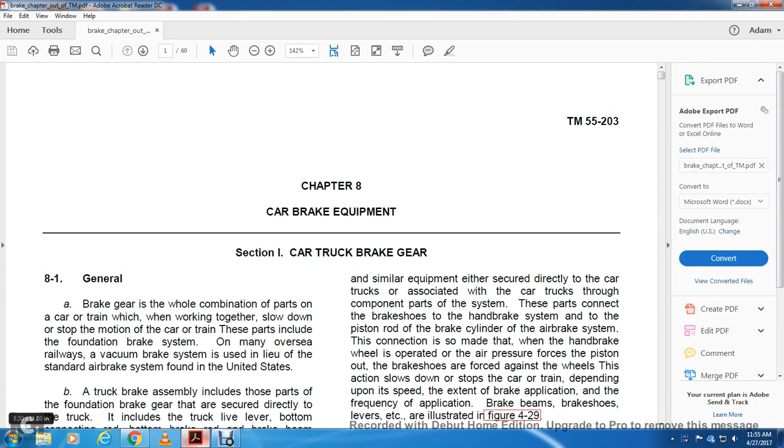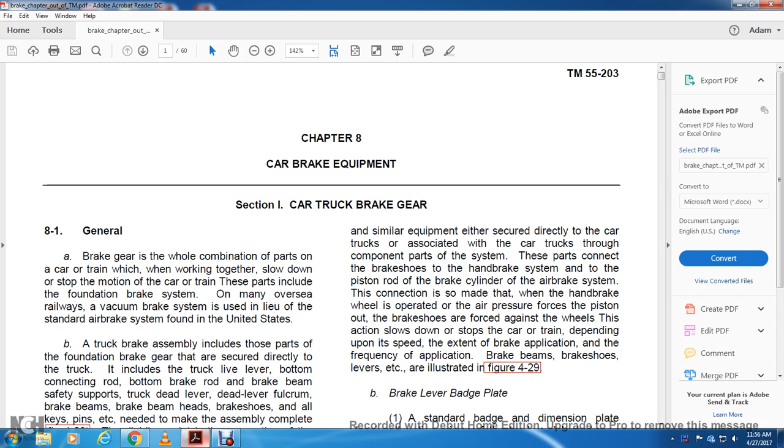Chapter 8, Car Brake Equipment, Section 1, Car Truck Brake Gear. Brake gear is a whole combination of parts for the car and train, and when working together, slow down and stop the motion of the car and the train. This part includes the foundation brake system and on many overseas railways vacuum brake systems, used in lieu of the standard air brake system found in the U.S.

B. The truck brake assembly includes the parts for the foundation brake with the gear secured directly into the truck. This includes a truck live lever, a bottom connecting rod, a brake rod, and a brake beam, safety supports, truck dead lever fulcrum, brake beam heads, brake shoes, and all key pins, etc., needed to make an assembly complete.

Figure 4-29. The dividing point of the connection of the truck live lever with the remainder of the foundation of the gear. Foundation brake gear parts include those parts known as the truck brake gear parts, standardized regulation specifications required by braking ratios fixed by the Association of American Railroads.

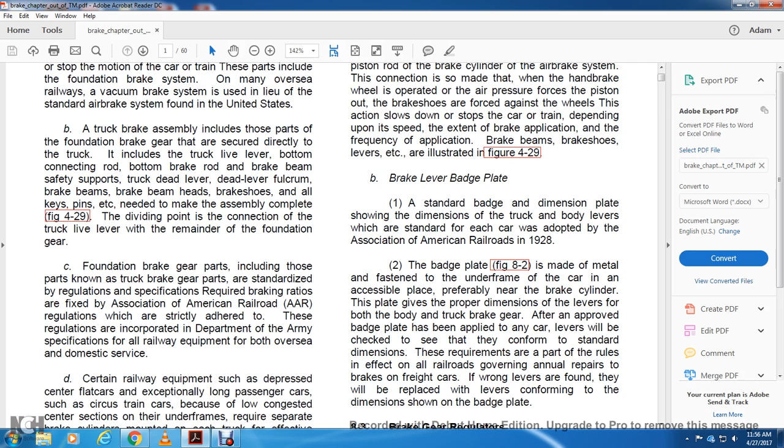Regulations strictly adhere to these regulations incorporated in the Department of Army specification railway equipment for both overseas and domestic service. Alright, certain railway equipment such as depressed center flat cars, exceptionally long passenger cars such as circus trains, are covered.

The low congested center section on the underframes requires separate brake cylinders mounted on each of the truck, effective with the brake action in lieu of the conventional single body mounted brake cylinder foundation brake gear. This difficulty is circumvented with the mounting of the complete independent brake cylinders on the foundation gear on each truck.

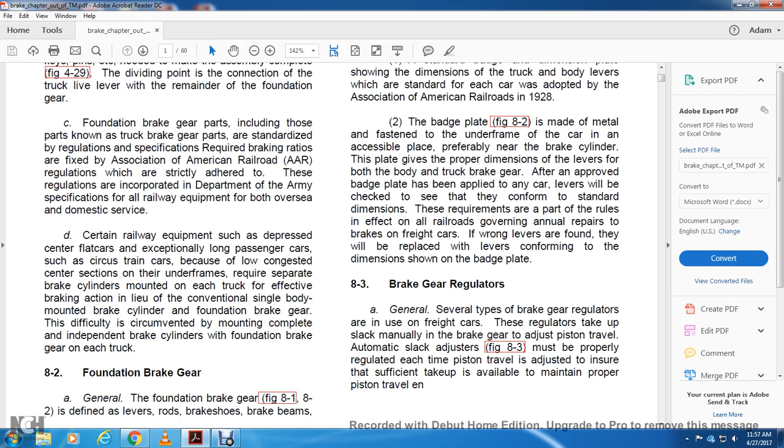8-2, foundation brake gear. Generally, a foundation brake gear in figure 8-1 and 8-2 is defined in lever, rod, brake shoes, brake beams, and similar equipment either secured directly into the car or trucks associated with the car trucks through the component parts of the system.

These parts connect the brake shoe handbrake system to the piston rod, brake cylinder, and the air brake system. The connection rod is made so that when the handbrake is operated, or the air pressure forces the piston out, the brake shoes are forced against the wheels. This action slows down or stops the car or train depending on the speed, the extent of the brake application, the frequency of the application, brake beams, brake shoes, and levers, etc., illustrated in figure 4-29.

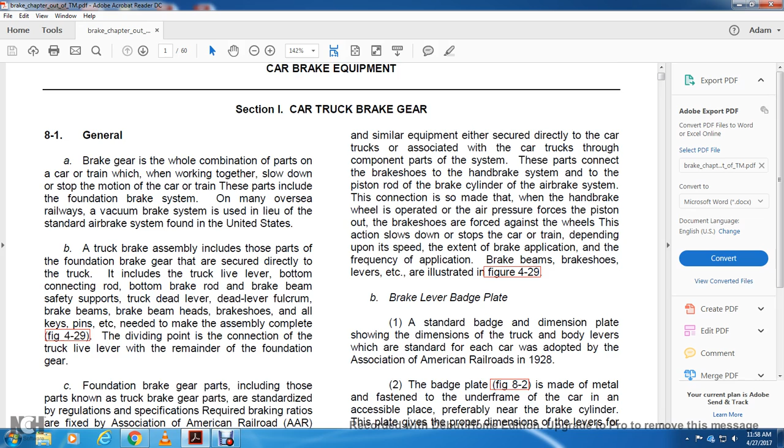B. Brake lever badge plate. A standard badge and dimension plate showing the dimension of the truck and body levers, which are standard for each car, was adopted by the Association of American Railroads in 1928.

The badge plate is made of metal, fastened to the underframe of the car in an accessible place, preferably near the brake cylinder. This plate gives the proper dimensions of the levers of both the body and truck brake gear. After an approved badge plate has been applied to any car, the levers will be checked to see if they conform to standard dimensions.

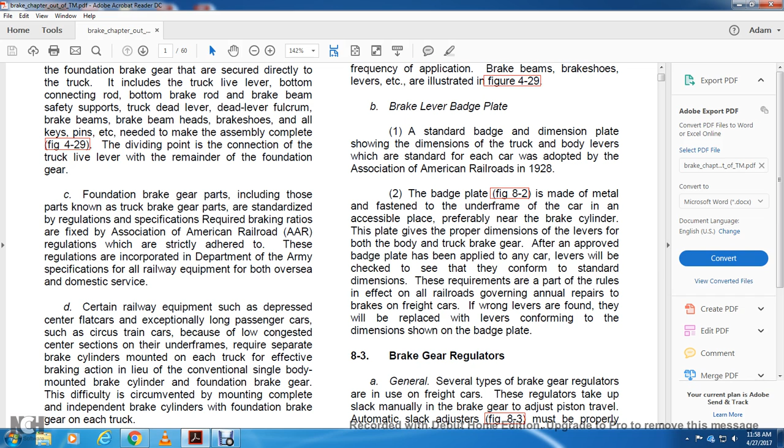These requirements are part of the rules in effect of the railroad governing annual repairs to the brakes of the freight cars. If wrong levers are found, they will be replaced with levers conforming to the dimensions shown on the badge plate. 8-3, brake gear regulators.

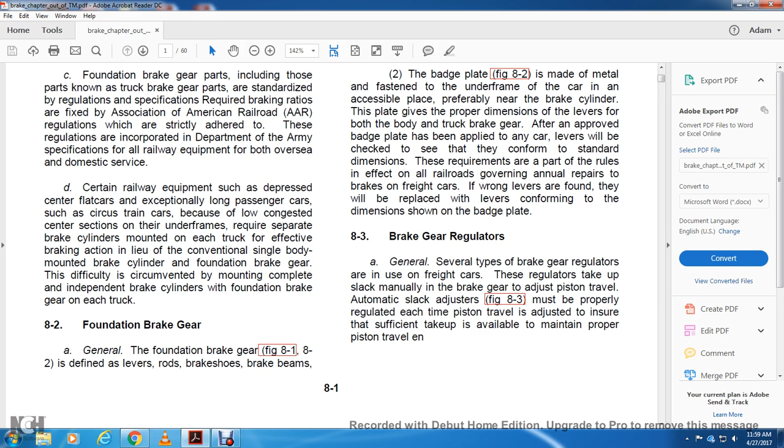Generally, several types of brake gear regulators are used on freight cars. These regulators take up the slack manually in the brake gear to adjust the piston travel. Automatic slack adjusters, figure 8-3, must be properly regulated each time the piston travel is adjusted to ensure that sufficient take-up is available to maintain proper piston travel.

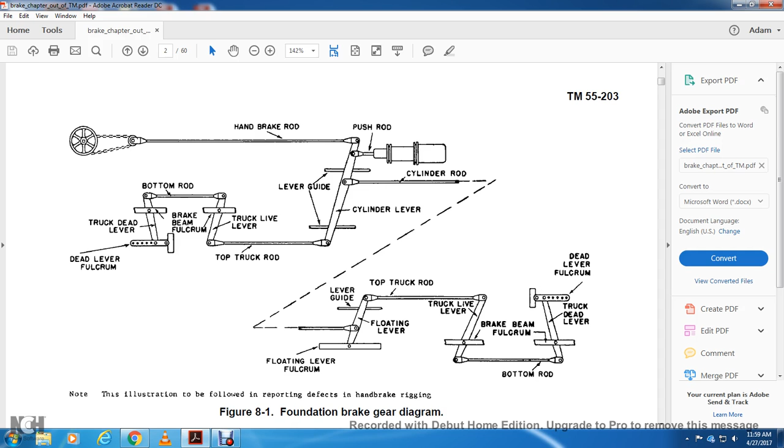En route and in service, per paragraphs 16.7 and 8.19, three types of regulators are described below. Type 1 is provided with a notched pull rod at each end of the car, which is connected with the dead lever to adjust the piston travel.

Pull straight on the handle, which is located on the right side of the coupler, and let go. A pawl on the notch pull rod locks when the rod is pulled as far as it will go. Then go to the opposite end of the car and repeat the operation.

To release and change the slack in the brake shoes, pull the handle, then give about an eighth of a turn to the right and push back all the way. This gives maximum slack to the air brake.

To adjust the piston travel, pull the handle lever as far as it will go and then release. To release the slack, push up on the pawl, and then push back the handle as far as it will go.

Type 3 is a third type provided with a rotating square shaft placed in the horizontal position under the car body, extending out under the outer sill of the floor of the car.

Two holes are drilled through the end of the square shaft. The short bar can be inserted with a hole on any of the four sides. The pawl wheel is placed on the shaft; the direction to turn the shaft to take up slack is indicated by an arrow on the housing enclosing the pawl wheel.

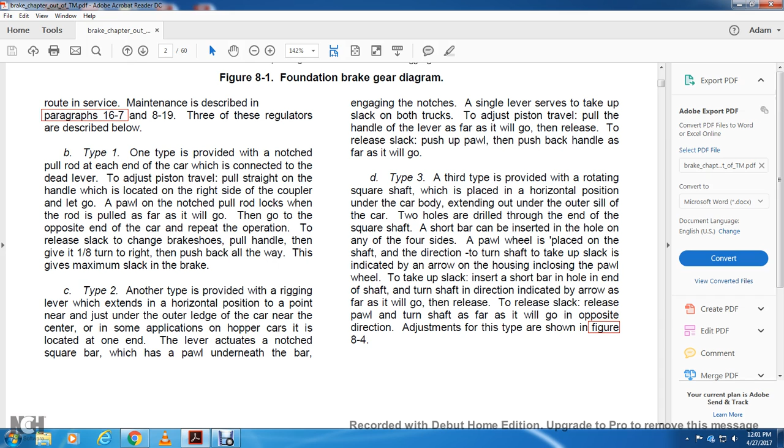Adjust the type as shown in figure 8.4.

Figure 8.2 is a typical brake lever badge and dimension plate.

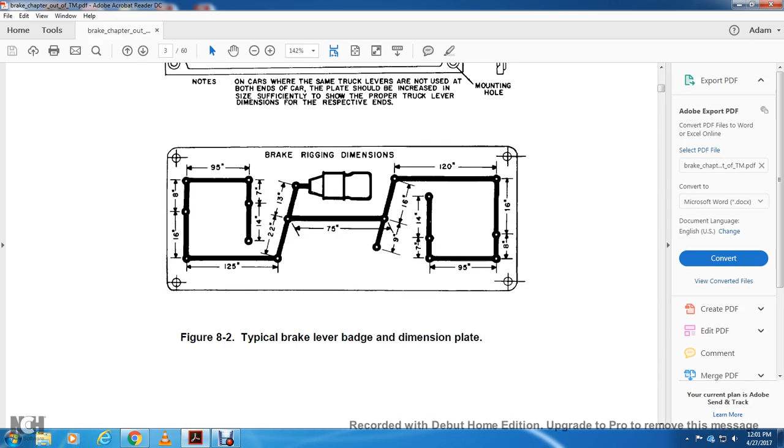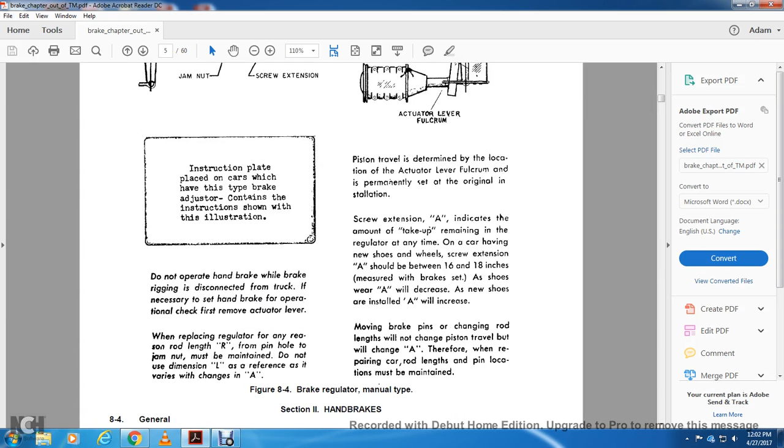An instruction plate placed on the car, which shows the type of brake and adjuster, contains the instructions shown in the illustration, with dimensions A and R.

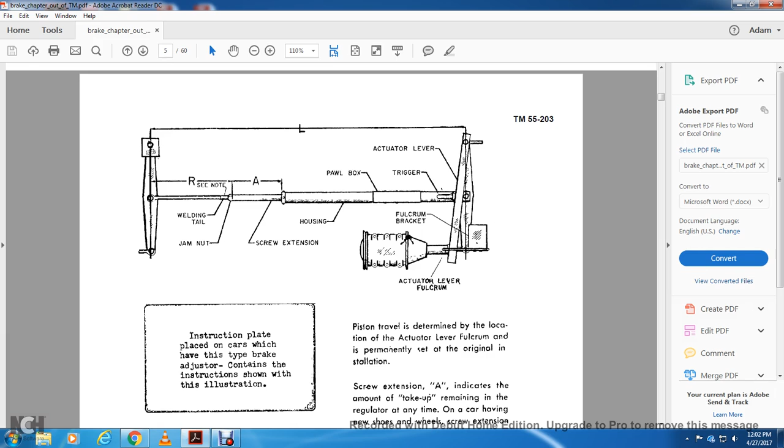Do not operate the handbrake with the brake rigging disconnected from the truck. If necessary to set the handbrake with an operating check, do not operate the handbrake while the brake rigging is disconnected from the truck. If necessary, set the handbrake for the operation check.

First, remove the actuator lever. When replacing the regulator for any reason, rod length R from the pinhole to the jam nut must be maintained.

Do not use dimension L as a reference, as it varies with changes to A.

Piston travel is determined by the location of the actuator lever fulcrum, permanently set at the original installation, and screw extension. A indicates the amount of take-up remaining in the regulator at any time.

On a car having new shoes and wheels, screw extension A should be between 16 and 18 inches, measured with brakes set. As shoes wear, A will decrease. As new shoes are installed, A will increase.

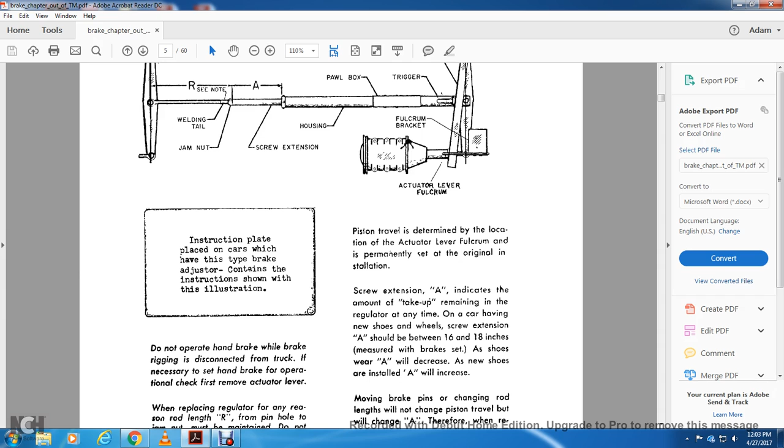Moving the brake pins or changing rod length will not change piston travel but will also change A. Therefore, when repairing cars, rod lengths and pin locations must be maintained.

Section 2, handbrakes.